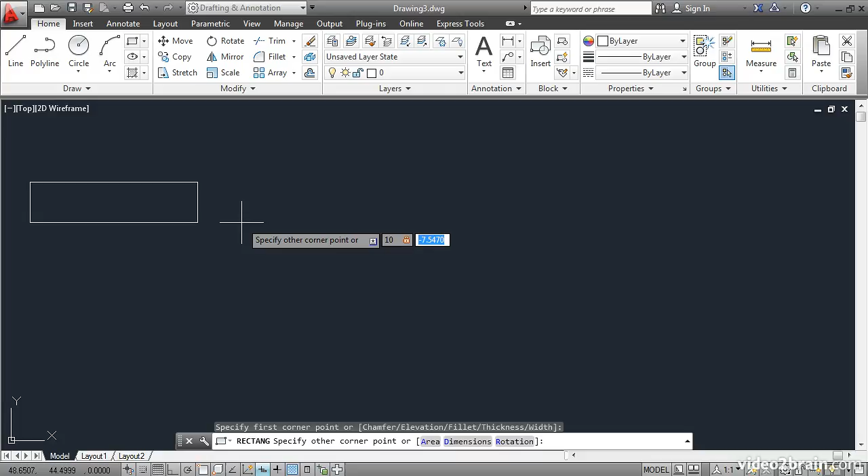So the first number is the x-coordinate, and I'll type in a number. Let's try 10. I'll press Tab to enter the second value, which is the y-coordinate. Here I'll type in 5 and press Enter. So I've succeeded in drawing my first rectangle that's 10 units in length and 5 units in width.

Let's try that again. Rectangle, click a first point, and then click a second point. So you can do it freehand like that, or you can use numbers.

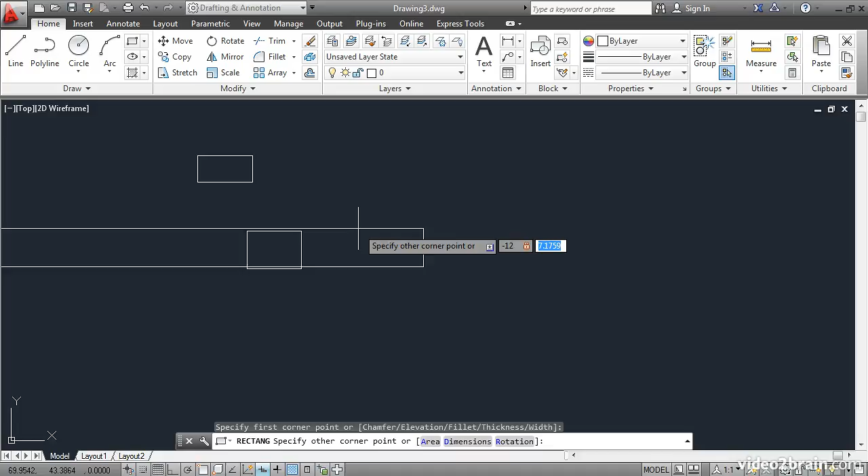I'll draw a third rectangle. This time, let's say we want the rectangle to go over this way, so we'll have to specify a negative x-coordinate because it's to the left of the initial point. I'll type in negative 12, tab, and then positive 8. Enter. So the rectangle went this way in the negative x direction and up in the positive y direction.

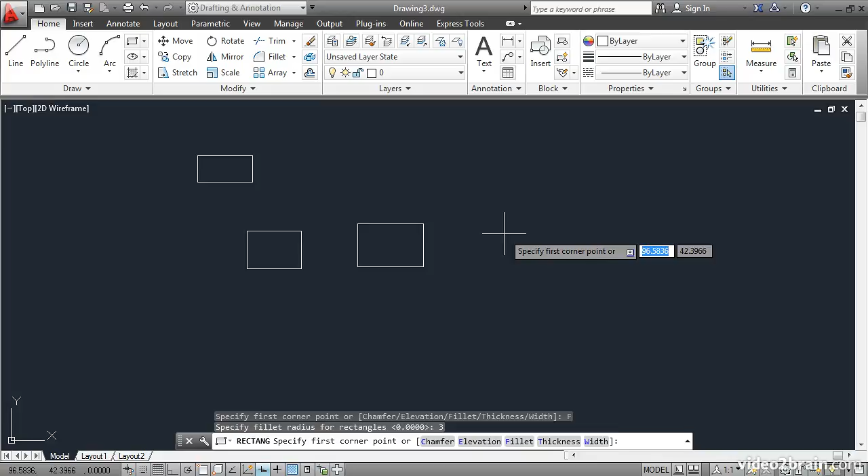Let's try another one, but this time we'll use one of the options. I'll click Fillet, and I'll specify a fillet radius of 3, and press Enter. Then go ahead and specify the first corner point, and as I move the mouse you can see what's happening. The fillet is a radiused transition between the perpendicular edges of the rectangle.

Again, we can specify the dimensions of this rectangle if we want. I'll type in 25, tab, minus 15, enter. You can see right here what it entered, 25, minus 15. You can do that on the command line if you're not using dynamic input.

I'll turn that off. Let's try another rectangle. I'll click a point here and type at 15, negative 8. So it made the rectangle 15 units in length and 8 units in width, and it went down from the initial point because I used a negative y coordinate.

Now, you may have noticed that the last rectangle automatically came with the same fillet radius I specified earlier. If you want to clear that out, you have to create yet another rectangle and click on Fillet, then specify the fillet radius as 0, and that will get rid of that curve.

This time let's try a chamfer. I'll click that option, and chamfers work as beveled edges, and they're specified with 2 different dimensions. Usually those dimensions are the same, but they can differ. Let's try 2 for the first chamfer distance and 2 again for the second chamfer distance.

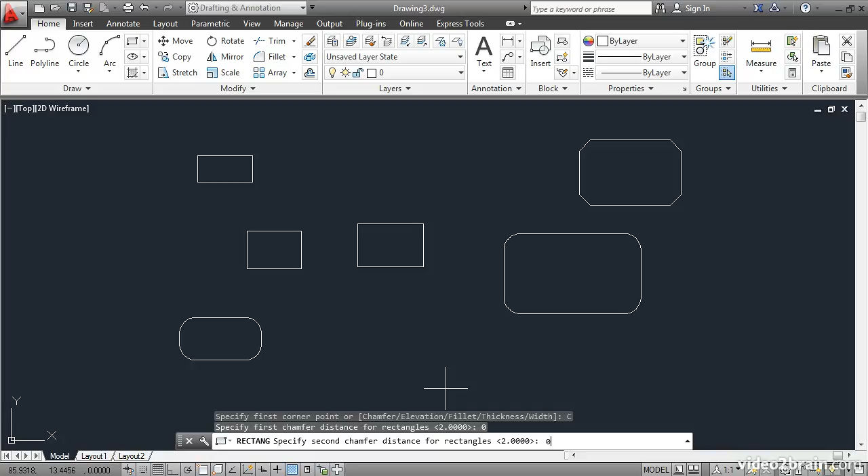Again, if I want to create another rectangle, it will have those chamfer values still in the rectangle command, so I need to clear those out if I don't want to use that. Let's try again. Rectangle, chamfer, 0, 0 again, enter. Now I've cleared those values out. I'll click a point and click again, and our rectangle command is back to normal, if you will.

Now I'll pan over to the side, and let's draw a circle of arbitrary size. You don't necessarily need to have a circle, but this will illustrate the point I want to make in regards to the polygon tool.

Go up to this flyout and choose Polygon from the flyout menu. On the command line it says enter number of sides. I'll say 4, enter. Specify center of polygon or edge. I'd like to specify the center of the polygon at the center of this circle.

For that I need to use Object Snap. Hold down Shift, right-click, and choose Center. Click on the circle's edge to snap to the center of the circle, which is highlighted in green. Now it gives me two different options, inscribed in circle or circumscribed about circle. Let's try circumscribed about circle.

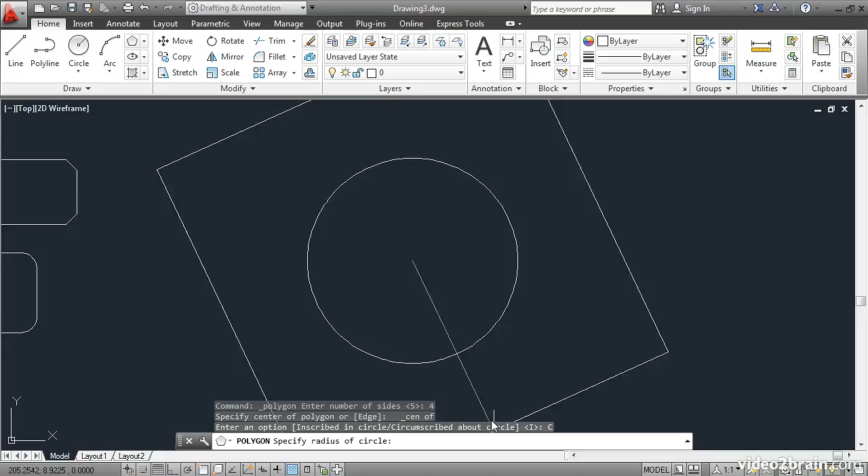Here you can see that I can draw this square around the outside of the circle in this way. I'd like to snap it so it's precisely the same size as the circle, so to do that, I need to snap to the quadrant point of the circle.

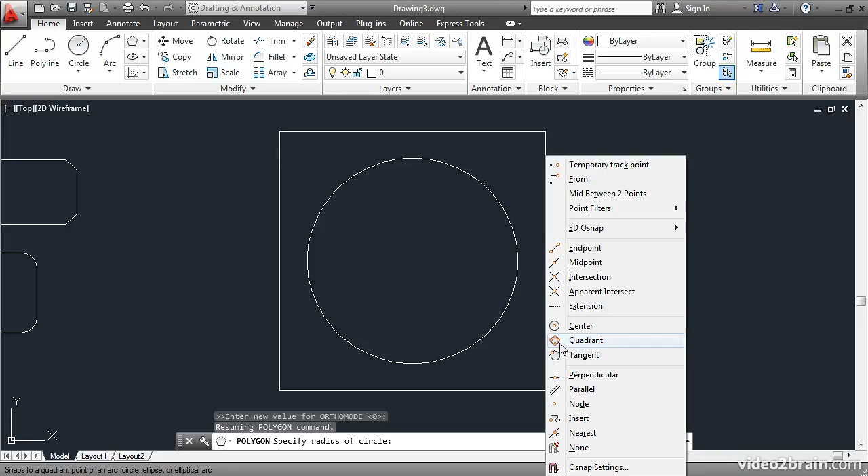Hold down Shift, right-click, and choose Quadrant. Its icon indicates what a quadrant is. They're the cardinal points of any circle or arc. I'll click here on this east quadrant to specify the radius of the circle. And now the polygon is complete.

Let's try that again, but this time we'll do it inscribed within a circle, and we'll use 5 sides. I'll specify the center point by holding down Shift, right-clicking, and choosing Center. I'll click on the edge of the circle to specify the center of the polygon, and then I'll use Inscribed in Circle.

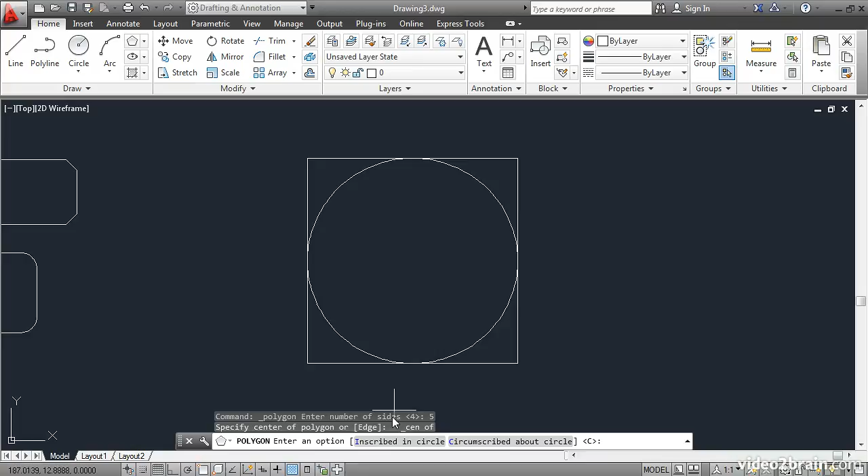I'd like to snap it up here, so I'll hold down Shift again, right-click, and choose Quadrant, and click right there. Now we have a pentagon perfectly inscribed within the circle.

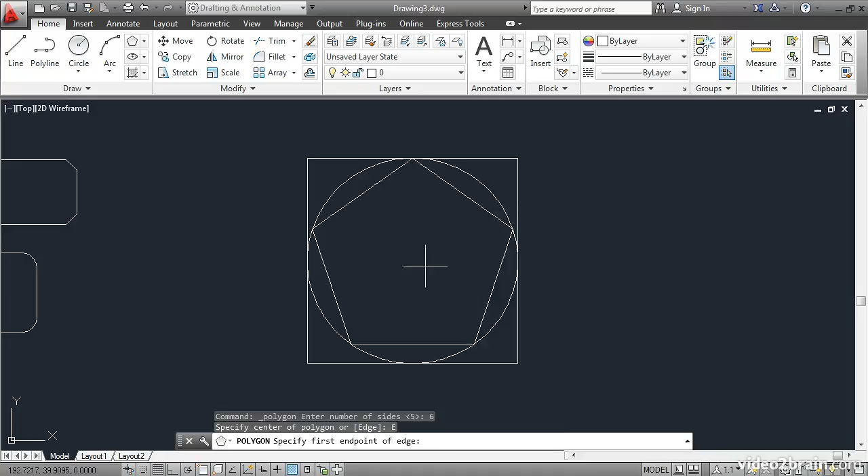There's one other creation method for the polygon tool: the Edge method. Let's try this. Click on Polygon, set the number of sides at 6, and use the Edge option. The first endpoint of the edge, let's say, is snapped to the endpoint of this pentagon. The second point of the edge will be snapped to the endpoint of this corner. Now we have a hexagon bound to the pentagon along their mutual edge.

You have learned how to create rectangles and polygons and explored many of their creation options.